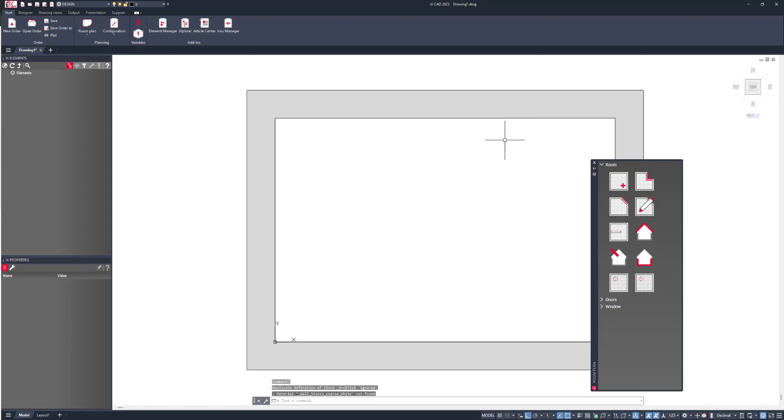Today I want to talk to you about room details and ceiling details in particular. So if we go to the Start and then Room Plan button, we can create a rectangular room by clicking on this button here. I'm just going to select my walls and make them a little thinner, let's say 100mm.

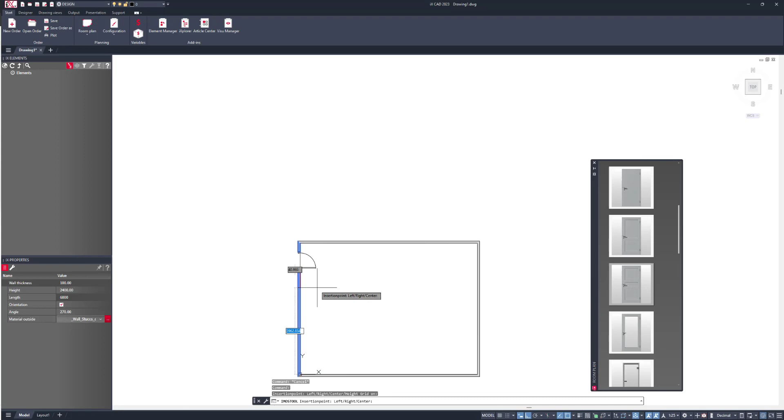And then what I'm going to do is just select a couple of walls here and make them a little bit longer. And then I'll just drop in some doors in here as well. So one of the nice features in IX23, the latest version of the software, is that we can edit these doors on the fly after we've been

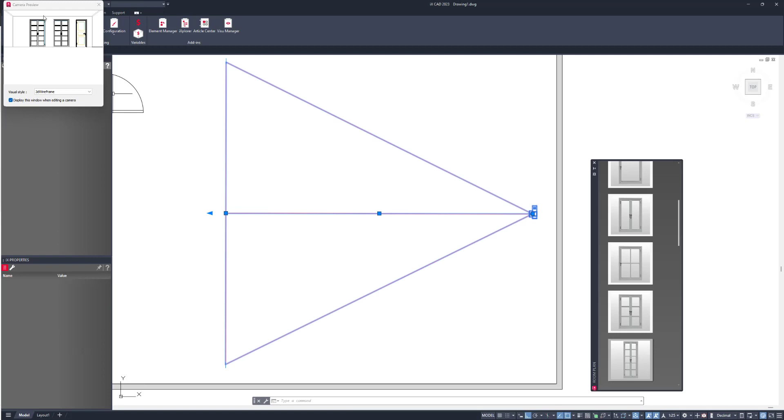inserting them. So what I'll do is I'll quickly create a camera. So I'll just type the command word camera and then position myself over here, looking in this direction, and press enter. I can then select the camera and you can see it'll bring up a preview, and right now I'm like a little mouse on the floor here, so I need to go a little bit higher.

So I'll right click and go to properties, and that'll bring up my properties palette for the camera, and I can say that my eye level is 1650. That's going to make it a little bit higher, and then I want to be looking pretty much straight ahead, so I'll say that the target is at 1650 as well.

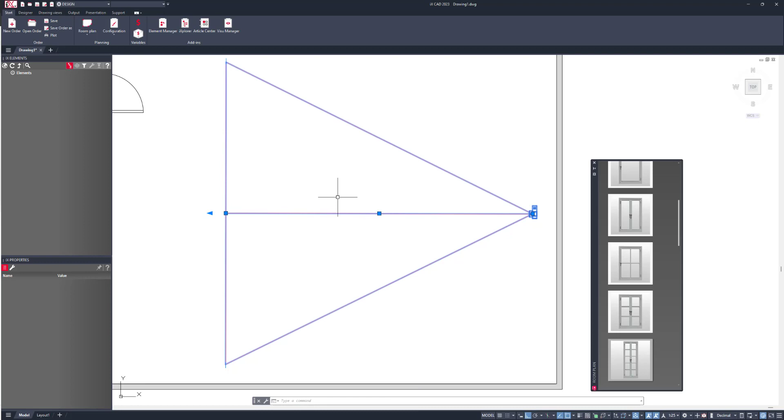Okay, now that I've positioned my camera, if I go to the presentation tab, I can click on camera, and you can see in here now I've got my room that I've created, and I'll get rid of my doors, and then in here you can see I've now got in IX23 the ability to customize these here. So I'll just say that I want to be a single door and I want it to be right hand hung, and I can even show this open if I want it to.

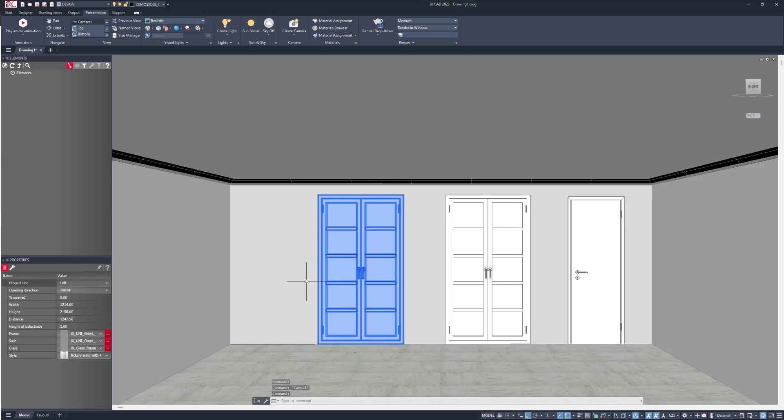Same would apply for the windows, so I'll click on those and I can then just change these out to be my preferred windows of choice. Okay. You'll also notice that I've got this coved detail in here, and this is because it's one that I've created automatically to come in when I create the room. So how have I gone about creating this?

Well, if we go to Open and open an AutoCAD drawing, you'll notice that if we go to the library folder, we have section DWG and then ceiling, and you can see that I've got quite a few in here already. Get in touch if you'd like me to share some of these with you, because this will save you a little bit of time if you do like to change up your ceiling details. But let's create one from scratch.

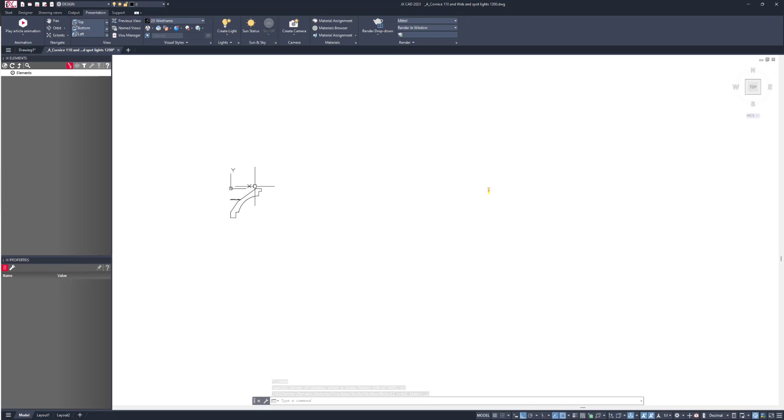So what I'm going to do is go to this one here, which is called a Cornice 110 with web and spotlights, and then I'm going to click open. And then what I've got here now is just a simple 2D drawing of the cross section of my cornice detail, and then I've got two lights over here, and then I've got this little text attribute box, which I'll

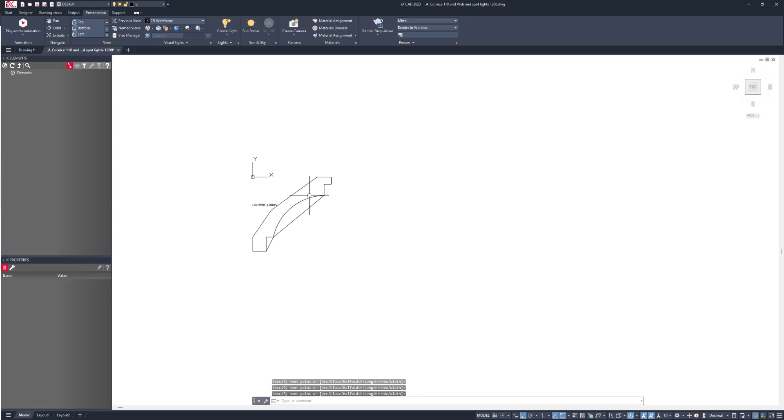discuss in a second. So the first thing I want to do is actually create my cornice detail, and this XY coordinate in here is quite important. So what I'm going to do is just trace over this and make a little bit more detail on it. So I'll say that, for example, this should be a more angular style cornice, and now that's going to be quite flat. And then what I can do in here is maybe just add in a bit of a circle or something like that, and then trim that out.

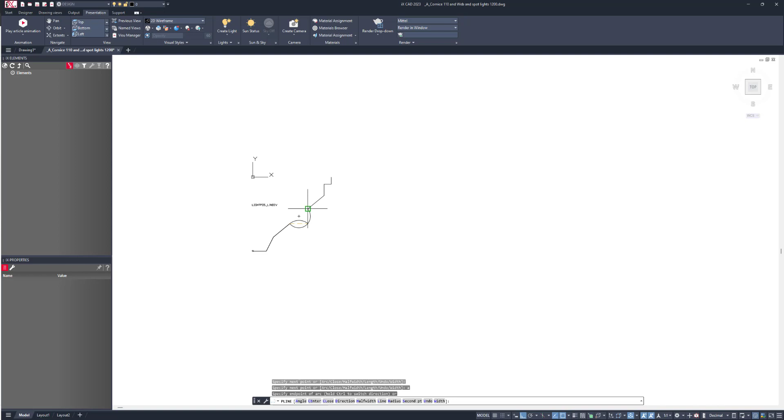And then what I want to do is just trace over this now, but with a polyline. So I can press A for arc, trace up to here, line, up to the top, and then I just snap my line work so that I've got the cross section of my cornice or moulding or whatever ceiling detail I want in there.

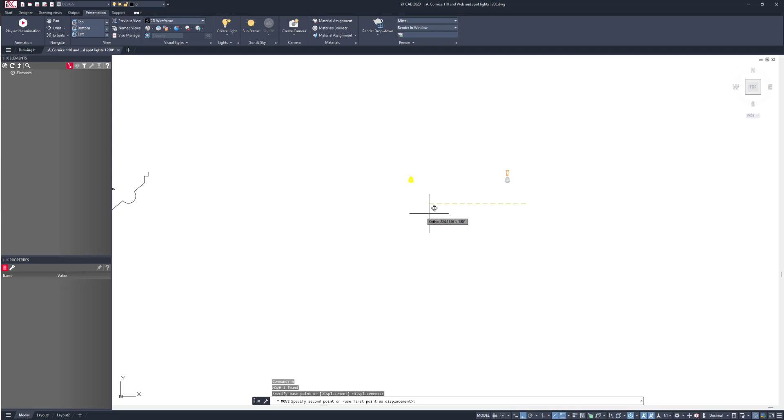Then I can move my lighting around. So what I'm going to do is I'm going to move my lights a little bit closer in here, and then I'm going to take this one and I'm going to actually rotate it around, pointing back at this, and then move it down so it's almost like the light is firing directly at the wall in here behind. This larger light in here, I'm going to move a bit further into the center of the room.

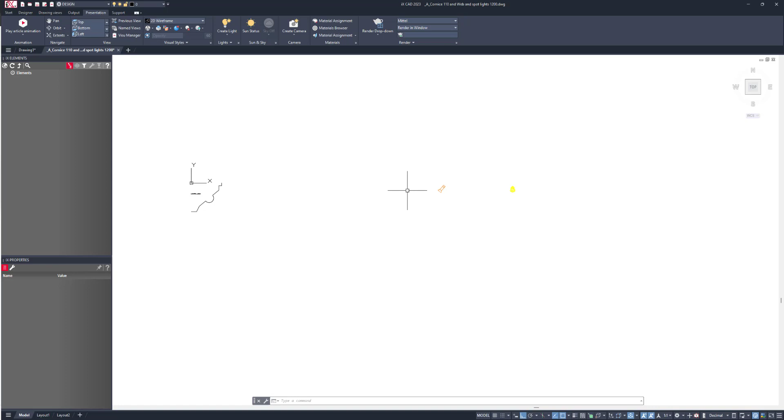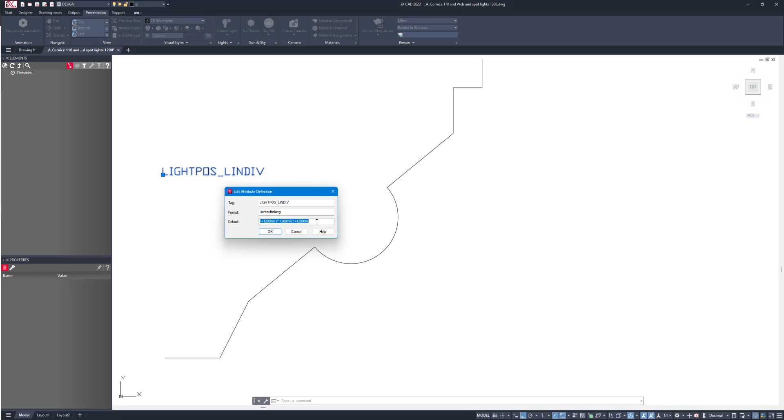So I've now got the two lights, and then what I want to do is control how those lights are spaced around the room. So in here I've got this attribute file, and if I double click and open up the settings, you can see that I've got the tag light pos lindiv, which I need to have typed in, and then a prompt. And then I've got a linear division in here controlling the quantity and spacing of the lights. So it's going to recognize those lights and then space them at 1200.

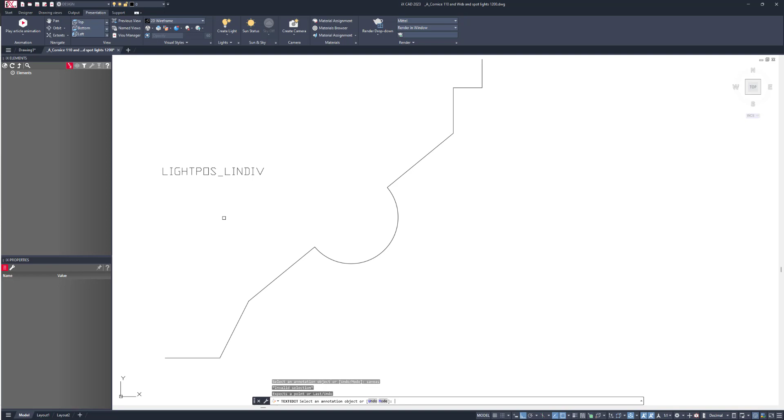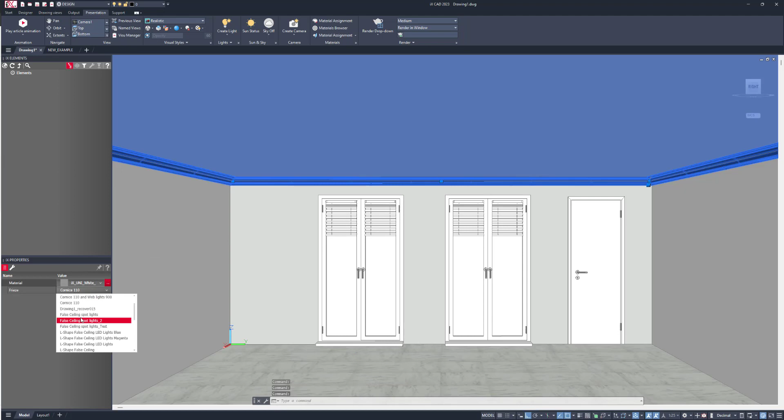And if you pause the video here, you'll be able to copy that linear division, or you can simply just say that I want these to be spaced equally along the length of the wall by using a linear division like so. Type in your linear division, and then let's just save. So in here, I'm going to save this as a new drawing. And in here, I'm just going to call this new example. Click save, and then go back to my drawing, click on the ceiling. And I can then change to be new example, and that's going to pull through my new molding detail.

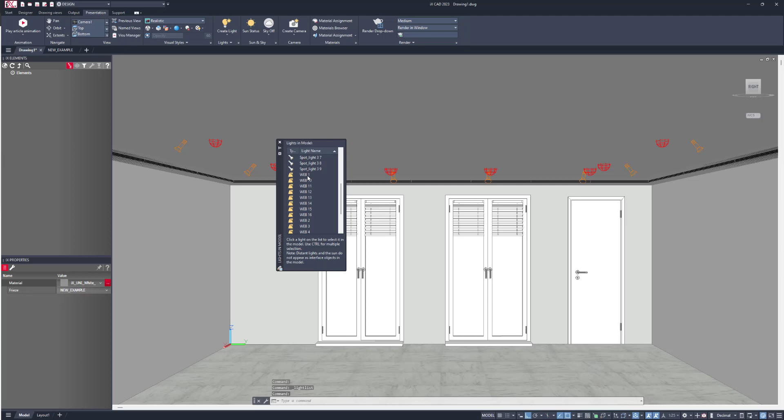And if I bring up my light glyph display and turn this on, you can see it's brought through now the lights pointing at the walls, and then it's also brought through those orange balls, which are the IES lights. So if I go up to the lights in here and then click on this little button here, I can then select those web lights and then go to the properties for the web lights. And then I can add in a particular web file.

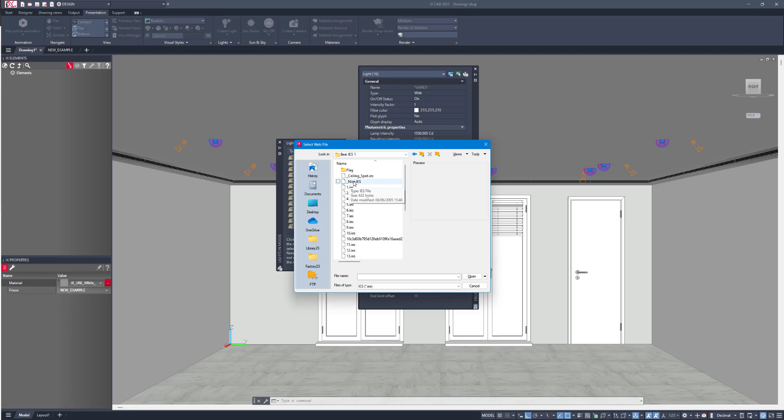So you can download from the internet IES data, which is real life lighting data. And I'm going to choose this ceiling spotlight data in here and say that this should be an incandescent color. It should be targeted. And in here, I'll just say that the intensity factor should be 1.5, let's say. Let's just have a quick render and see what the results look like now. So I'll just go and put in a full HD, medium quality. I won't turn on the adjust exposure, so it's like it's at night time. And I'll just double click on the teapot.

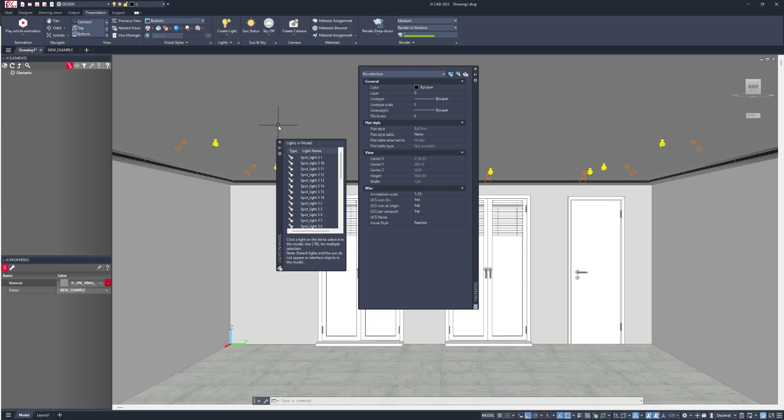And you can see in here, my lights are quite bright, so I just need to turn those down a little bit. And I think I'll also alter the ceiling color as well. So let's just change my ceiling color in here. I'll go for a light grey ceiling color and change my wall finish. And instead of that being a stucco color, let's go for a grey brick sandblast, something like that. So I've just got a little bit of texture on there.

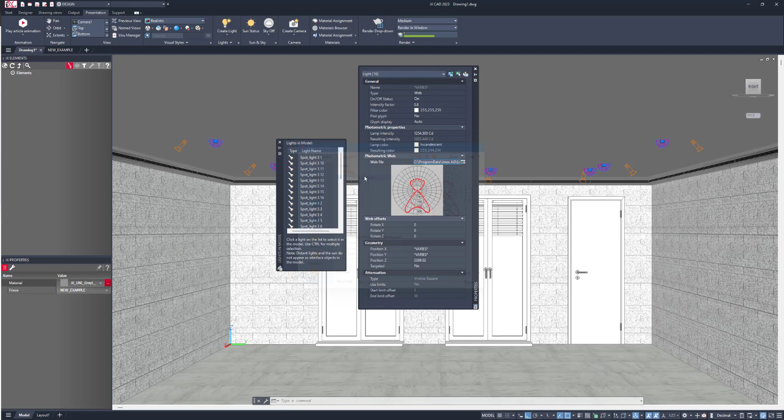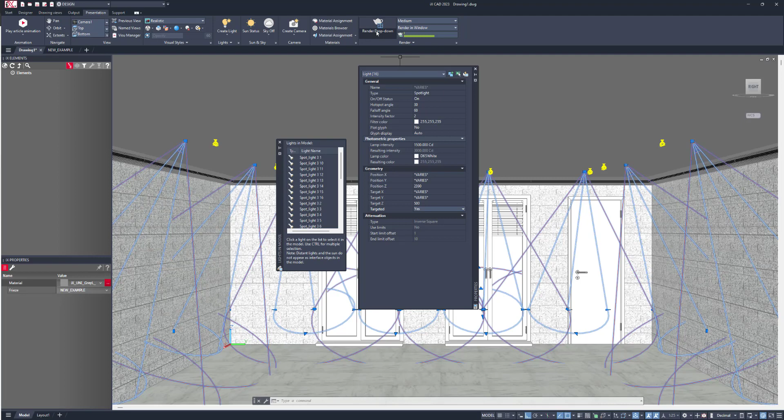Now let's go to my lights again, and I'll say that they should be 0.8 power incandescent using the same lighting. And then we'll go to the other spotlights in here, the ones that are pointing at the walls, and say, yes, these are targeted. And then the target should come a little bit further down the wall, a little bit more. Let's say it should be more like 500. I can also alter things like hotspots and fall-offs in these settings. And if I now just go to the teapot and just render again.

Okay, so still quite bright. So one of the best ways to alter that is to go to the exposure, and then in here, just make that a little bit darker. There we go. And you can see I'm getting some little white spots in here, as well as the lighting coming through. That's how you can create custom ceiling details. In the next video, we'll take this a step further and look at more complicated ceiling and roofing.